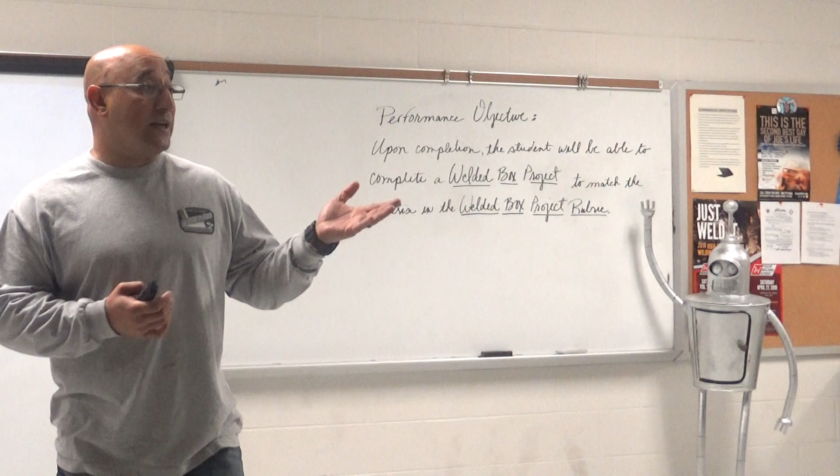Okay, I think for this project, with the thickness of the material we're going to need to be using, the plasma is going to be the best setup. It's going to give us our cleanest cut, allow us to cut apart with the least amount of warpage in our material, and the least amount of cleanup.

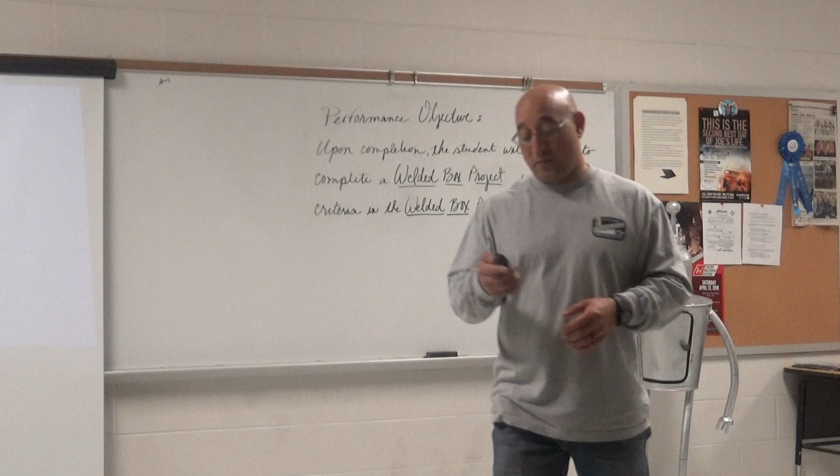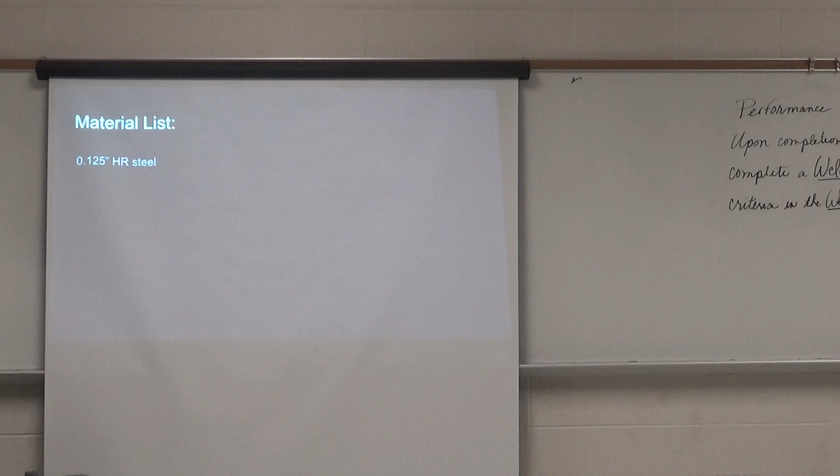Okay, so I went ahead and put together a list as well, kind of along the same thought process. We're going to use some 0.125 steel that's nice and thin. It's not too bulky, but it's robust enough to do what we needed to do.

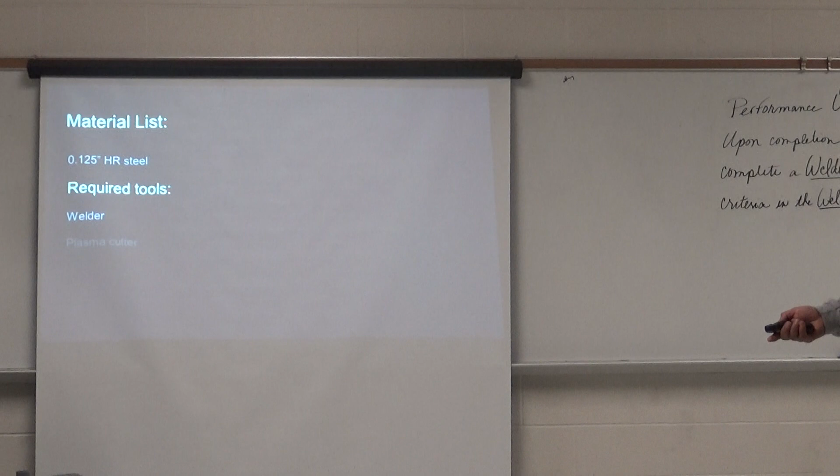Obviously we're going to need to use a welding machine, and that's going to kind of be up to your choice. Plasma cutter, tape measure, okay? Because we're going to have to draw dimensions, so that we know how to do this.

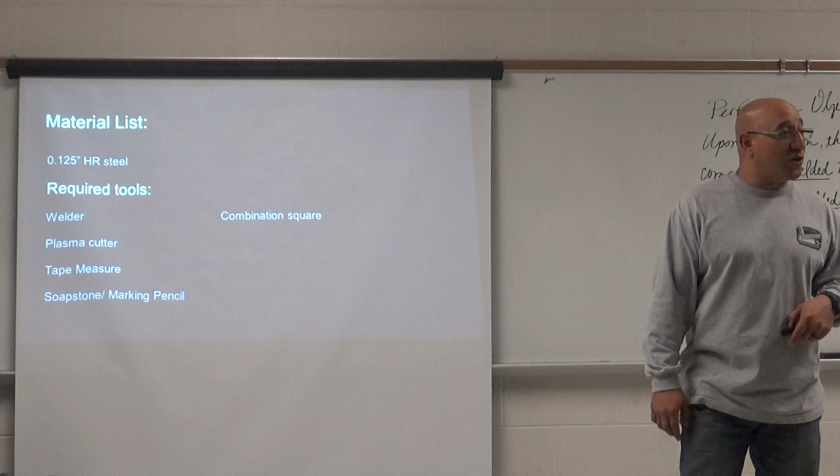Soapstone, marking pencil, combination square would be useful in helping us draw straight lines, 90 degrees. Some scratch paper to get our thoughts from here onto paper.

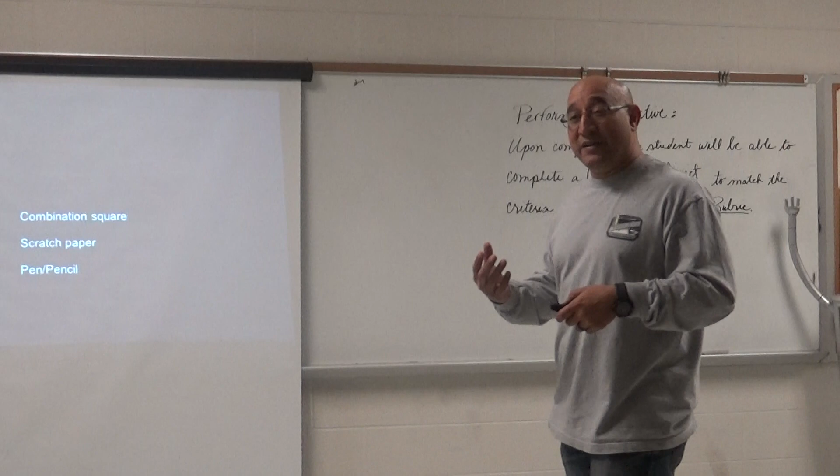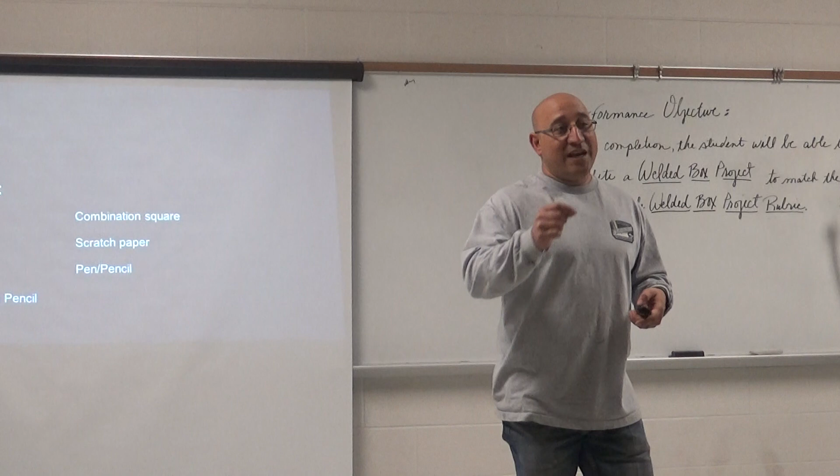I like to see things. I can't always just think of it in my head and then create it. Sometimes I need to draw it out so that I can see what it is. And oftentimes, if you're thinking something in your head and you draw it out, you might be able to see a flaw real quick that you had. You can catch it before you get too far into the project.

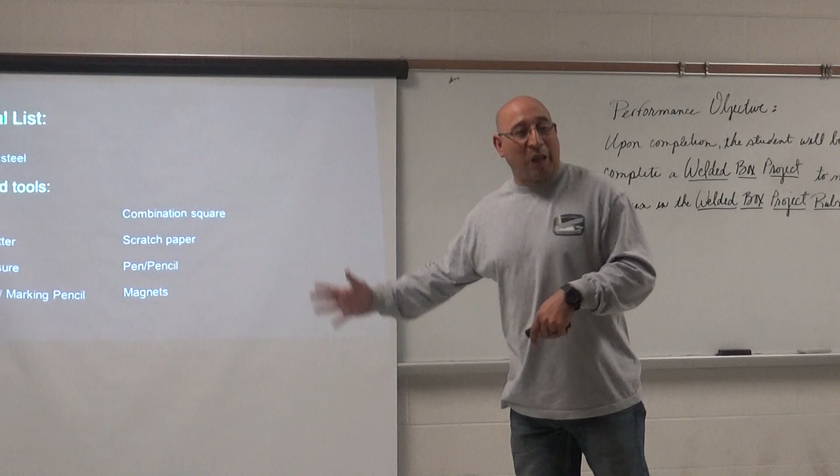Magnets, clamps, things like that, just to sort of hold things. So looking at everything we had, if you'll come over here, this is kind of what I wanted to be able to put into our box.

Just little normal tools, tape measure, safety glasses, which should always be on your head, but if you're like me that wear glasses, when you weld, sometimes the lenses give you a double vision effect, so sometimes I like to take them off, but I keep my hood down. I need to have them close by so that when I stop, I can put them right back on. Welding pliers, chipping hammer, wire brush.

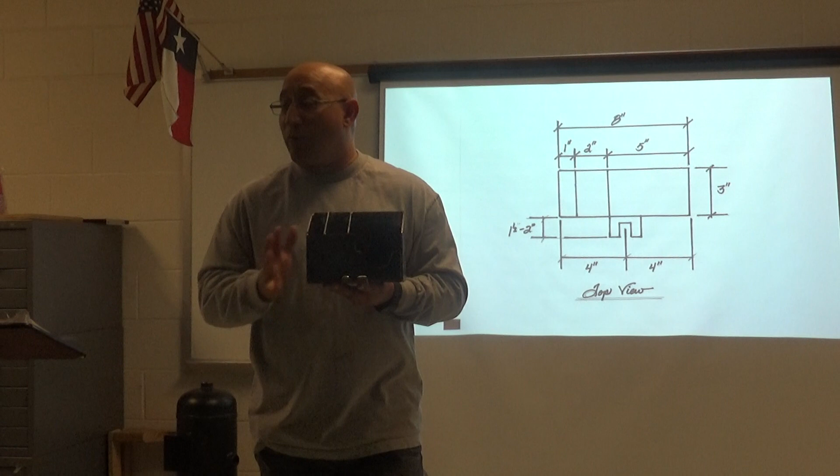Now, since I am a visual learner, and I like to see things, I went ahead and tacked together a little small one. We can kind of use this as a guide for when y'all are creating yours, because I want it modeled sort of like this one, because I want them all as close to uniform as we can get.

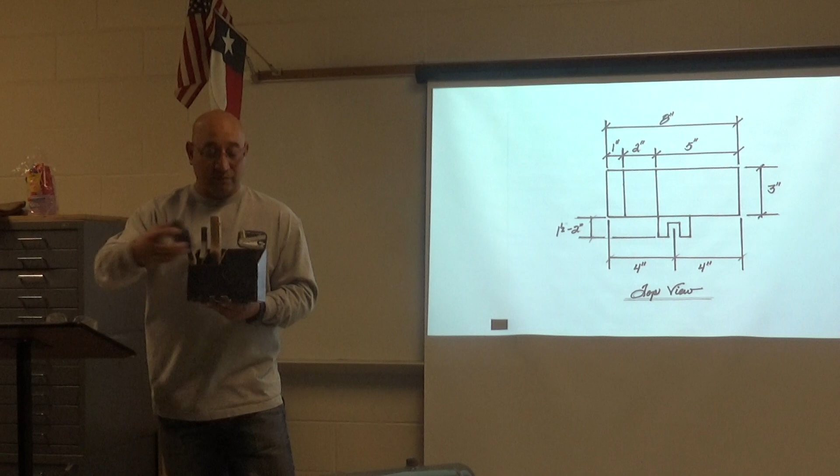So if you look at this, this does everything that we're asking our little project, our performance objective, is going to do. Holds our pliers, holds our brush, holds a tape measure, it could hold safety glasses, and lastly it could hold our chipping hammer. Just like that. Now look how nice, neat, and organized that is.

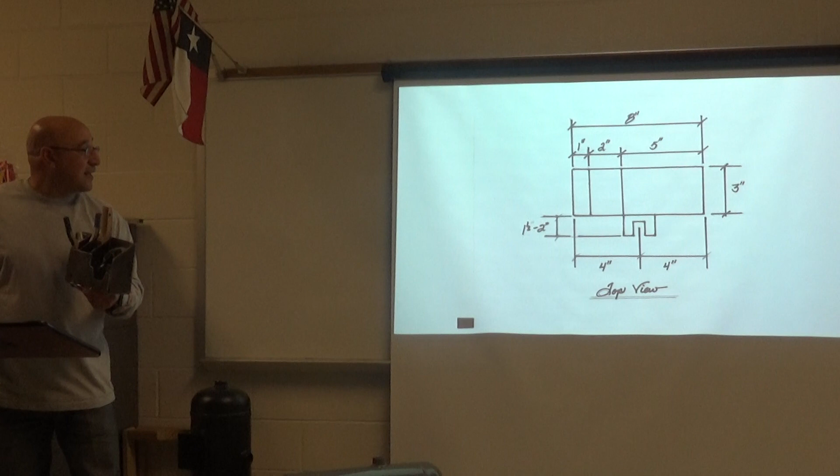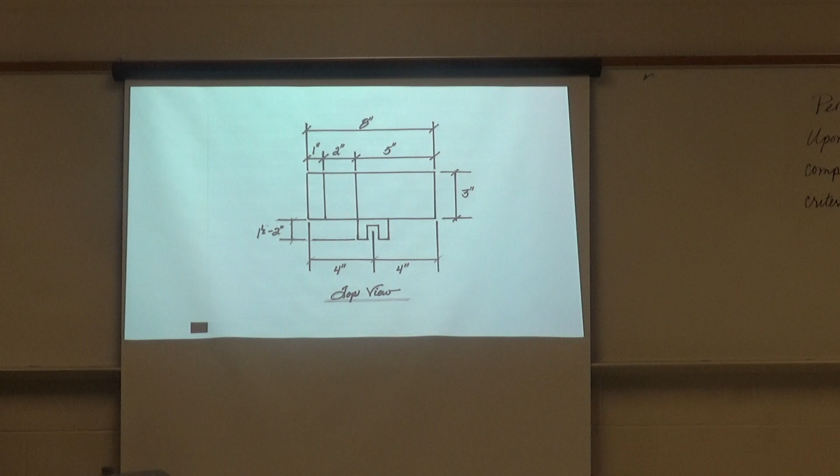Alright, so these next slides, you'll see I've kind of dimensioned it off of what I've made, that way it doesn't get too big, doesn't get too bulky, and it kind of lets you get a visual of what it needs to be. So look, right here we're going to be about 8 inches. We're going to need to find some material where we can get all these sizes out of. There's a little side view, and if you look at my sketch, it pretty much matches my made one, my little model, if you will.

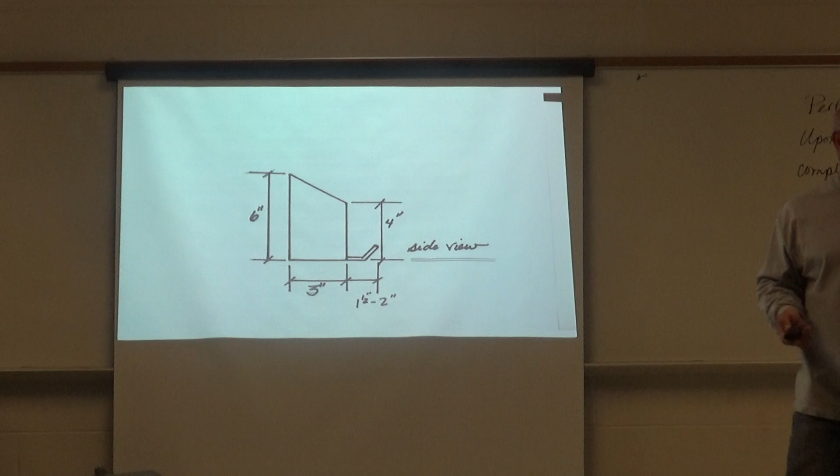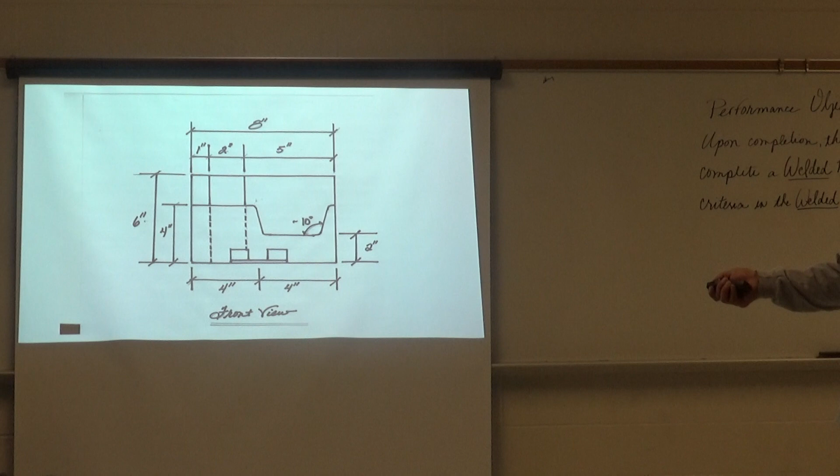There's our front view. And I said some of this stuff, we're going to have a little bit of leeway. I'd like to keep it as close to this as we can, but we may not be able to, depending on where we're going to attach them onto the booth. Like I said, once it's done, that's what it should look like. And obviously we're not going to set it on the welder like it is. We'll attach it to a wall, or something else out there if we need to.

What else do you think we need to know about this project as we put it together? Anybody? How we're going to fit it up, right? When you weld stuff together, what are some of the different joints we have when material meets? We have a butt joint, where you got one piece of material and it butts up right there to the other one.

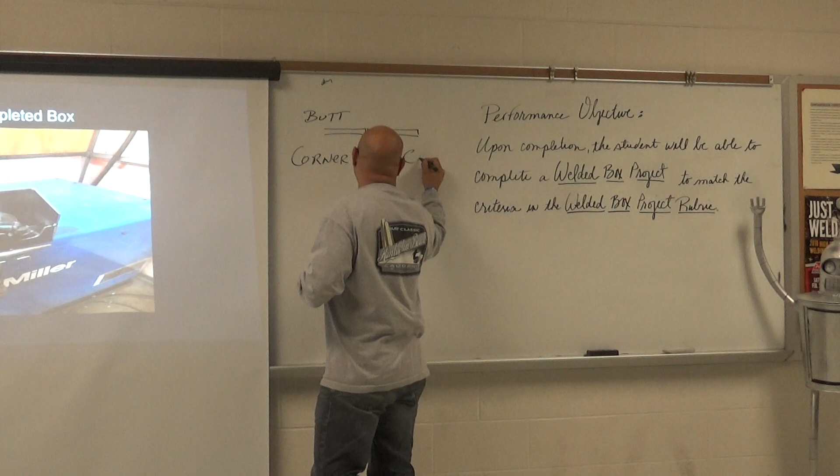We can do a corner fit up, what I call corner to corner, where if you have one piece of metal, it goes right here, it goes right there, then your other one meets right here. And that lets you put your weld right here, fill it up all the way out. When you do our butt weld, obviously it'll be right here.

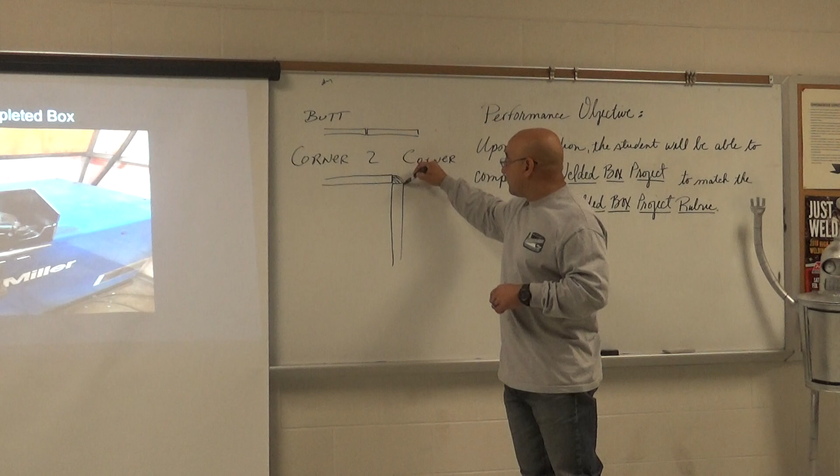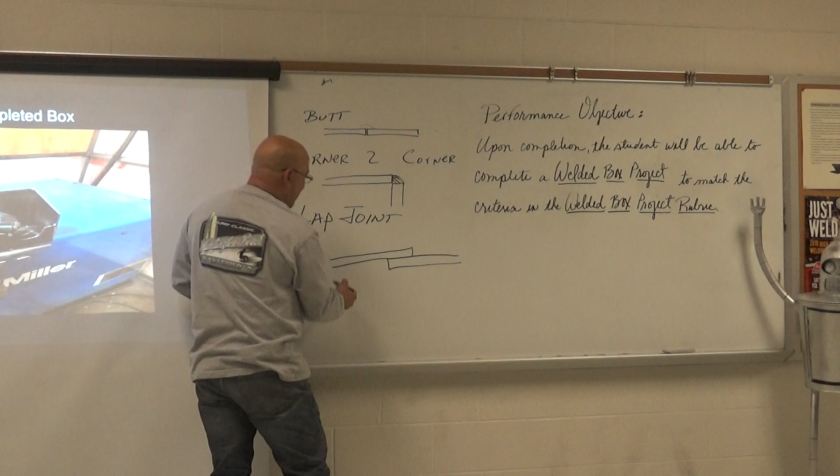We also can do it in what's called a lap joint, where you have one piece of material right here, maybe you have another one that joins right there, where they kind of overlap into themselves. So we're going to need to look at which is going to be best for our scenario.

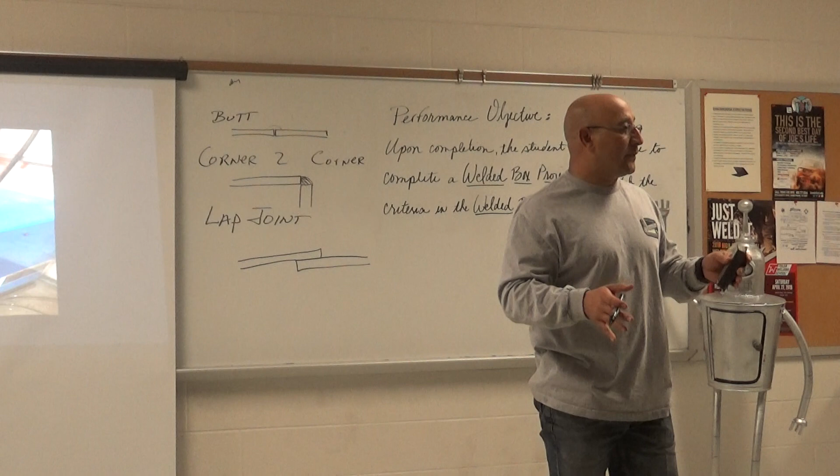So as we continue this process, which, this is only a 20-minute video, we're not going to make it through the whole thing. That's the kind of things we need to keep in the back of our mind, as we're going to this and as we continue this again tomorrow.

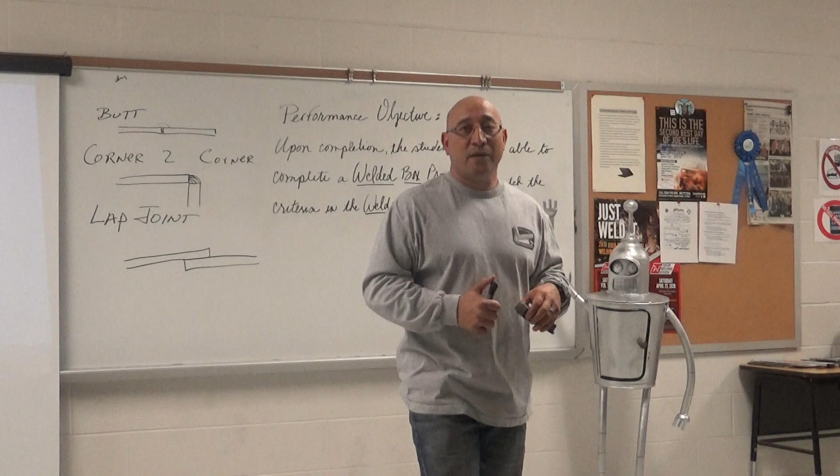Are there any questions right now about what we're doing, why we're doing it, how we're going to do it? I think we're good. You think we're pretty good? We got this? Why are we doing that? To organize our welding booth. Okay, thank you, and that is all.